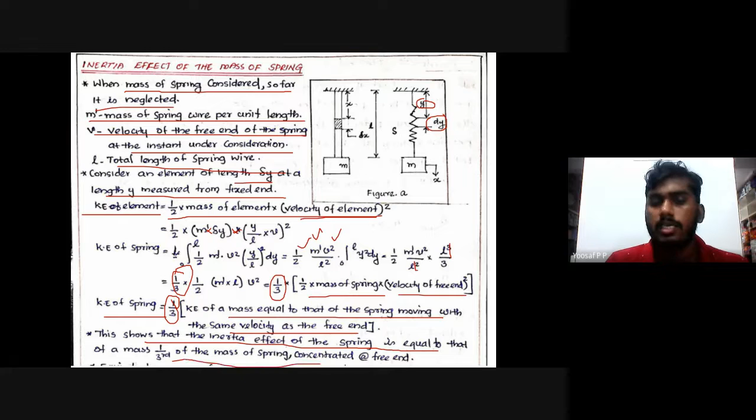So the frequency will be Fn is equal to 1/2 pi root S by (m plus m1/3), where S means K, the spring constant or spring stiffness. That is 1/3 of the mass of spring. It can be noted that the net force on the spring at any instant tending to restore the vibrating mass to equilibrium position is proportional to the displacement of mass. In a vibrating system due to elastic force, the restoring force is proportional to displacement from equilibrium position.

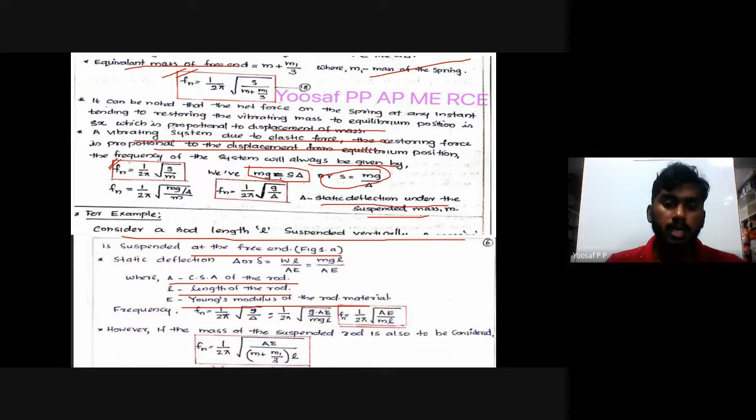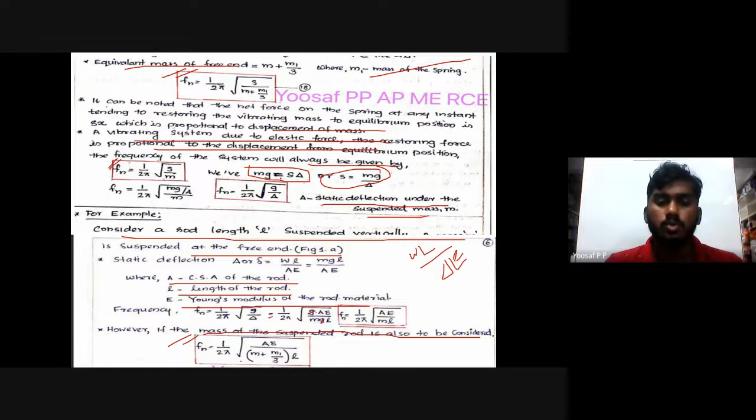So if a mass is suspended, the rod's mass is also considered. Frequency will be 1 by 2 pi root AE divided by equivalent mass, m plus m1 by 3, into L. Is it clear? Now determine the equivalent spring stiffness and the natural frequency of the following vibrating systems: first, when a mass is suspended to a spring. Second one, suspended to bottom of two springs in series. Third one, fixed between two springs.

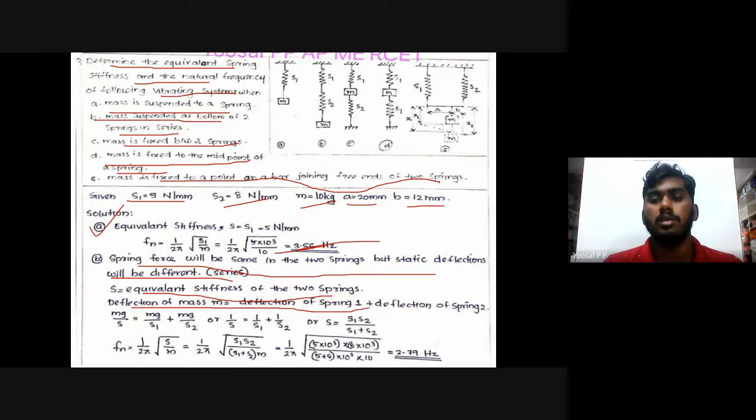So deflection of mass m is equal to deflection of spring 1 plus deflection of spring 2. That is mg by S is equal to mg by S1 plus mg by S2, or 1 by S is equal to 1 by S1 plus 1 by S2. So S is equal to S1 into S2 divided by S1 plus S2, and frequency Fn is equal to 1 by 2 pi root k by m.

So you can just substitute the equivalent stiffness here. You will get S1 S2 divided by (S1 plus S2) into m. So you just directly substitute, you will get the value 2.79 hertz. This is the equation for a series connection.

Now let us see, if a mass is placed in between two springs, the spring force will be different but the deflection will be the same for the two springs.

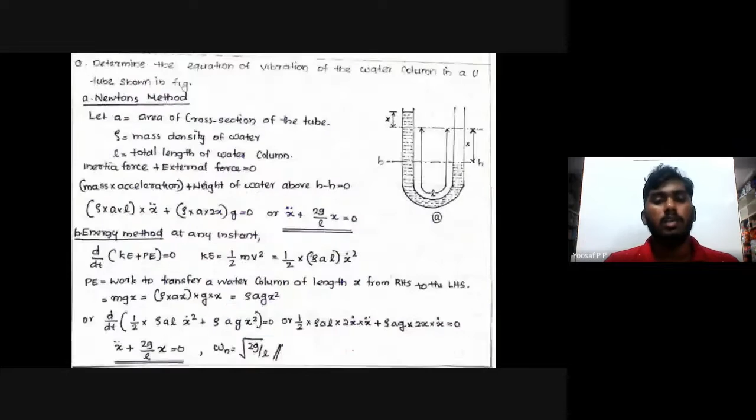So for the system similar to case C, since it is the midpoint, we can write spring stiffness is equal to 2S1 plus 2S1, that is 4S1. Again with the equivalent spring stiffness 4S1, you just substitute, you will get the value. Okay, now let us move to another case.

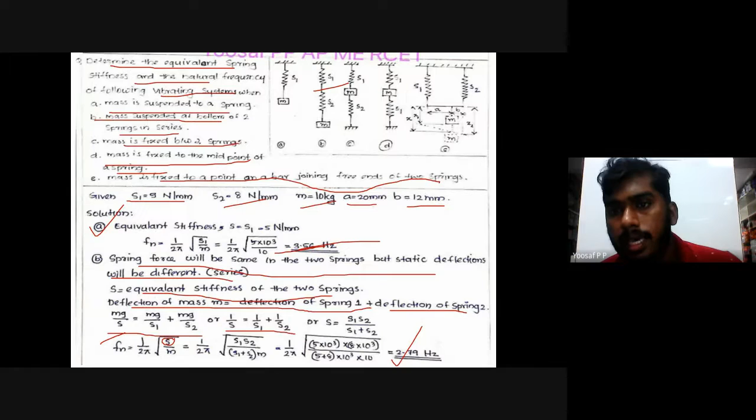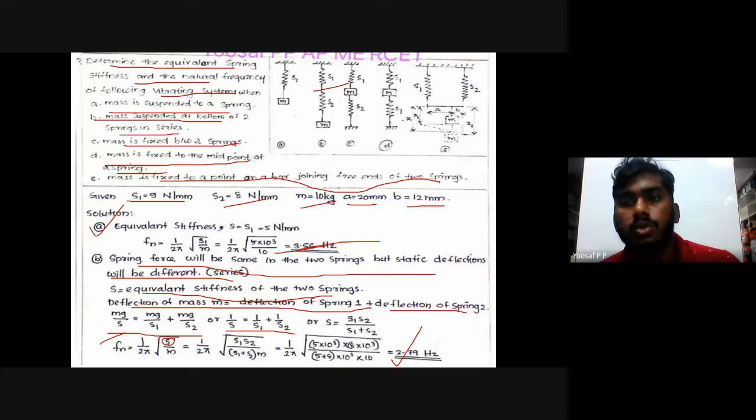Here there will be distances x1, x, a, b. Two springs are there, mass is attached at a distance a from spring 1 and b from spring 2. Total vertical deflection of the second one is x2 and the first one is x1, and mean distance is x. These are the given data. So the spring forces as well as the static deflections of the two springs will be different.

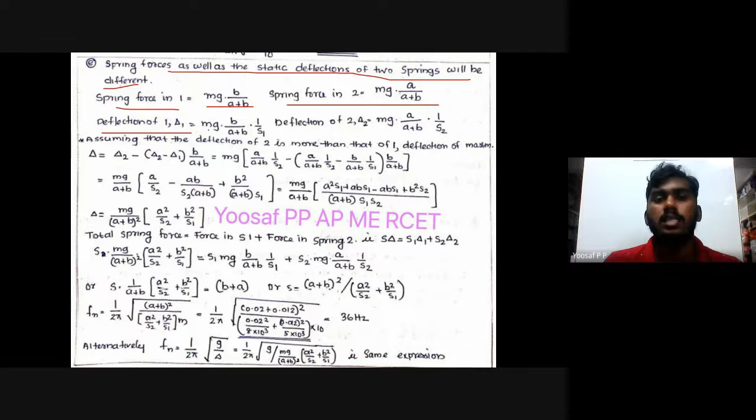So spring force in the first one is equal to mg into b divided by a plus b. Spring force in 2 is equal to mg into a divided by a plus b. Deflection of 1, delta 1, is equal to mg into b by a plus b into 1 by s1. Deflection of 2 will be spring force into 1 by s2. Assume that the deflection of 2 is more than deflection of 1. So delta is equal to delta 2 minus (delta 2 minus delta 1) into b by a plus b.

So here you can write it as mg into a divided by a plus b into 1 by s2 minus (a by a plus b into 1 by s2 minus b by a plus b into 1 by s1) into b by a plus b. So you can take the common term, that is mg divided by a plus b. Here the first term will become a divided by s2 minus ab divided by s2 (a plus b), plus b square divided by (a plus b) s1.

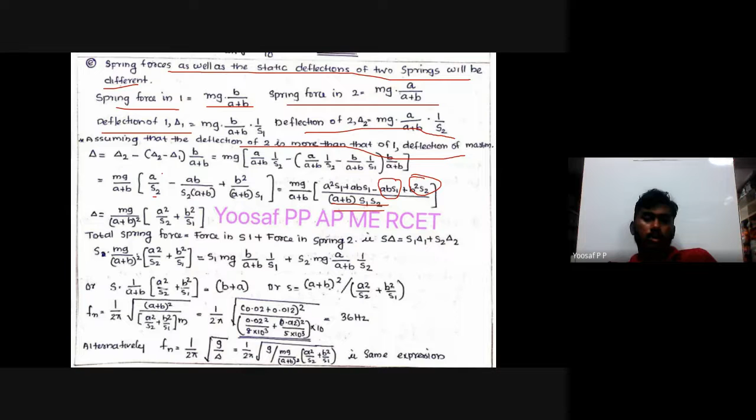So on rearranging, you can write it with the common term s1 s2 (a plus b) in the denominator. For the first term over S2, you have to multiply A plus B into S1 in the numerator. For the second term, you have to multiply S1 AB. Here is B square with denominator S1 into A plus B, so you multiply S2 here, and S2 B square will be here. S1 AB is in the second term. So the first term will become like this: A square S1 plus AB S1.

So finalizing the equation, delta is equal to mg by A plus B whole square into (A square by S2 plus B square by S1). So total spring force is equal to force in spring 1 plus force in spring 2, that is S delta is equal to S1 delta 1 plus S2 delta 2. So just substitute here: total spring force is S into mg by A plus B whole square into (A square by S2 plus B square by S1).

Here the force in the first spring is S1 mg B by A plus B into 1 by S1, and here S2 mg A by A plus B into 1 by S2. You can rewrite it with the common term outside. So S into 1 by A plus B, mg gets cancelled, A square by S2 plus B square by S1. Outside will become B plus A. All other terms will get cancelled.

Okay. So the equivalent S is equal to (A plus B) whole square divided by A square by S2 plus B square by S1. Here with this S, you can change this side to the right side of the equation. So you will get like this. So frequency you can find it out.

This is the equivalent spring stiffness, and this equivalent spring stiffness can be applied in the equation. Directly substitute the value: 1 by 2 pi root of S by M. You can substitute the value of S here. So you will get 36 Hz.

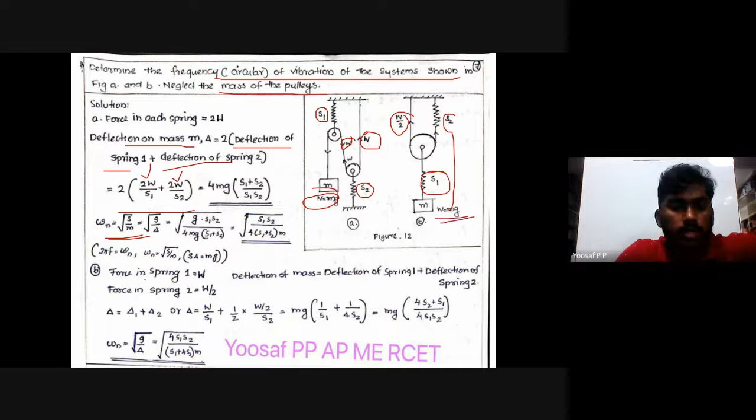Second case, here W by 2, the spring stiffness S1 and the spring stiffness S2. W is equal to mg. So force in spring 1 is equal to W, force in spring 2 is equal to W by 2. The deflection of mass is equal to deflection of spring 1 plus deflection of spring 2. So delta is equal to delta 1 plus delta 2.

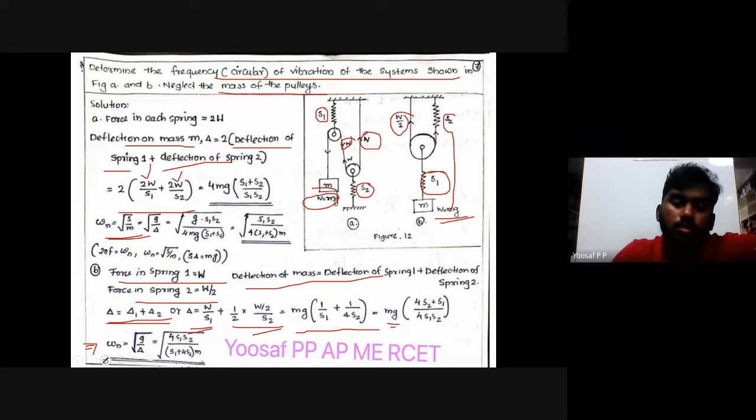Delta is equal to W by S1 plus 1 by 2 into W by 2 divided by S2. So mg into 1 by S1 plus 1 by 4 S2. So mg into (4 S2 plus S1) divided by 4 S1 S2, or the natural frequency Wn is equal to root g by delta, equal to root 4 S1 S2 divided by (S1 plus 4 S2) M. Okay.

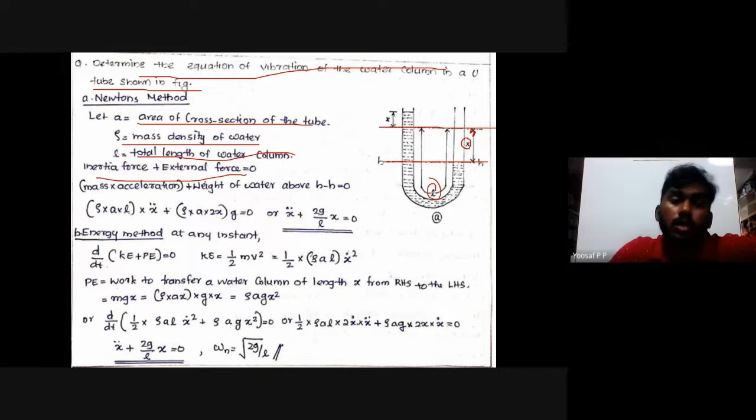Let A be the area of cross section of the tube, density of material rho, L the total length of the water column. Inertia force plus external force should be equal to 0. So inertia force is mass into acceleration, rho AL into x double dot, that is the acceleration. A into L is the volume, mass by volume. So this will be m x double dot. And the second is the weight of the water above b-b.

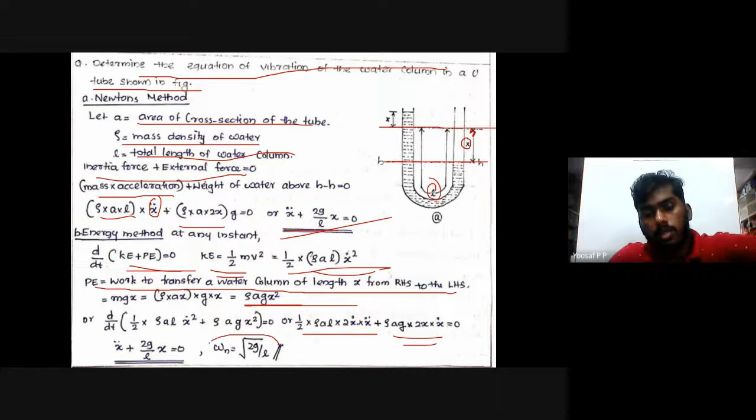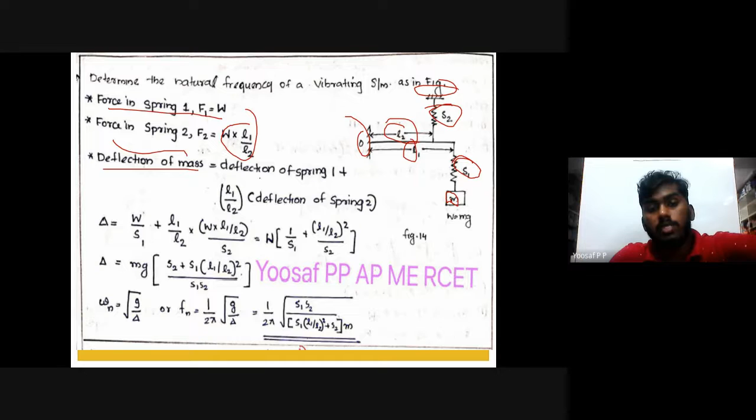W is equal to mg. So force in spring F1 is equal to W, force in spring 2 is equal to W into L1 by L2. So deflection of mass is equal to deflection of spring 1 plus L1 by L2 deflection of spring 2. You just substitute the value: W by S1 plus L1 by L2 into W into L1 by L2 divided by S2, or take the common term W outside.

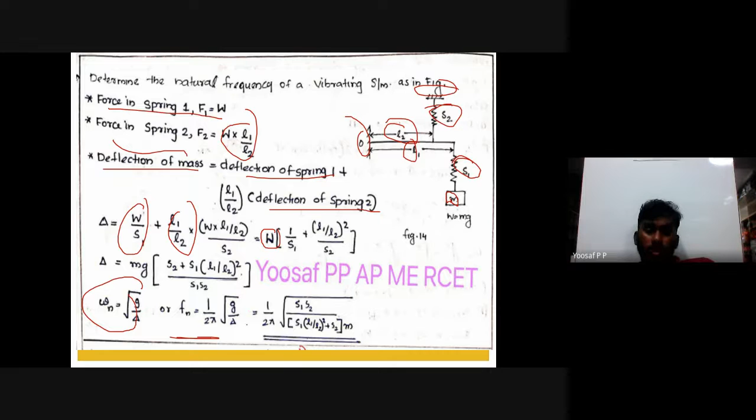W into 1 by S1 plus (L1 by L2) square divided by S2, or mg into (S2 plus S1 (L1 by L2) square) divided by S1 S2, or natural frequency from g by delta. For natural frequency you can find fn is equal to 1 by 2 pi root g by delta, just substitute the equation. Okay, thank you.